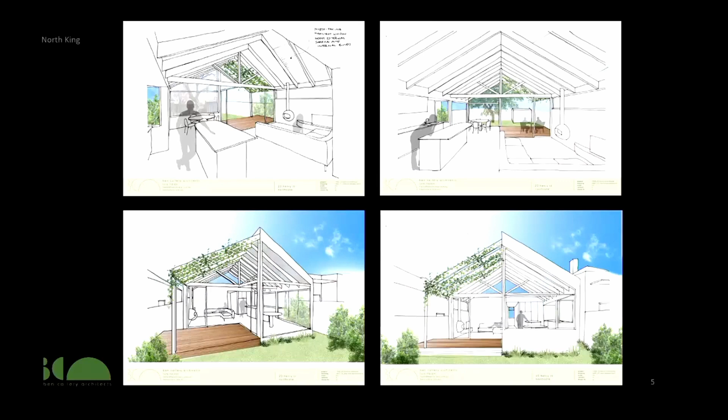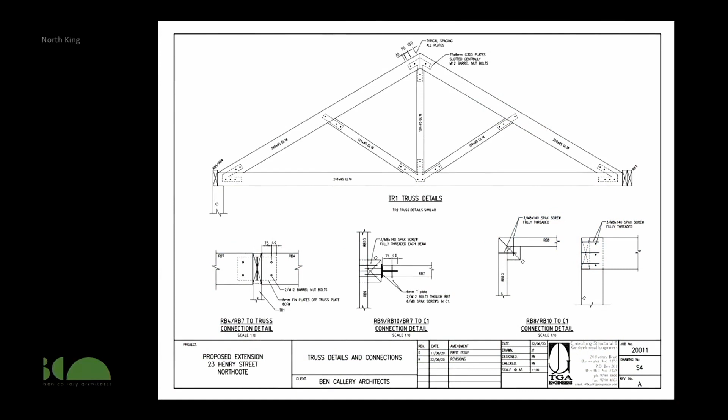So in this project, we're interested in pushing low embodied energy. No steel, virtually no concrete, apart from the stumps. And so we engaged an engineer who specialises in timber structures, because most of our regular engineers would want to use a steel portal frame for a 7.5 metre span.

The truss is an expression of the values of doing more with less, efficiently achieving a large span, an engineered solution using natural materials detailed beautifully. It and the rafters express the structure while providing natural warmth, and the angled struts geometrically echo the branches of the backyard tree.

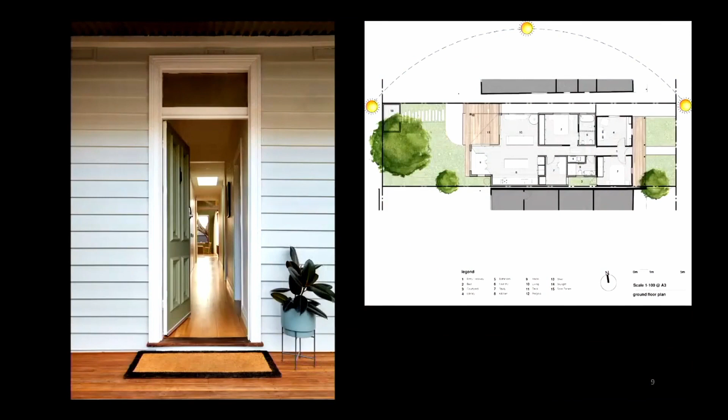So we kept the front of the house as required under the heritage overlay. Basically redid the floors, wall linings, and upgraded insulation throughout. It's a really compact footprint. Our clients initially wanted to go 2-storey, but we convinced them that a well-considered single-storey design would meet their needs and allow them to put more money into the quality rather than quantity of space.

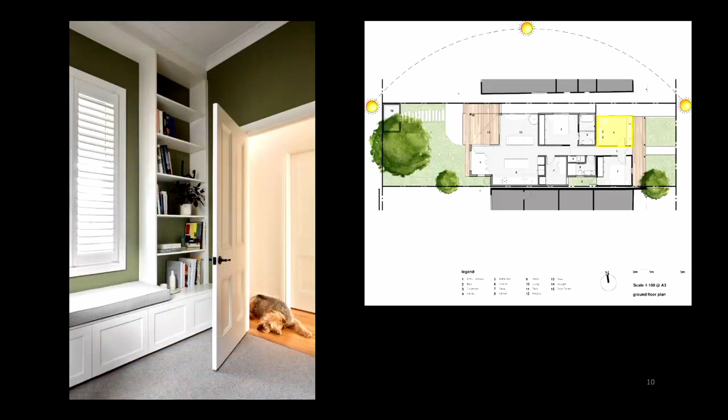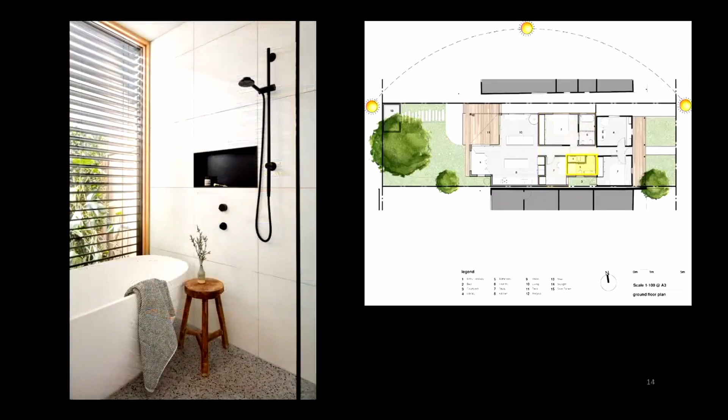The front 2 rooms were retained and appropriated as a library and a bedroom. And then under a new low flat roof between the old and the new, we inserted a new compact study and a bedroom with an ensuite. And a Euro laundry and bathroom. With the compact footprint, obviously the use of light to create a sense of space is really important.

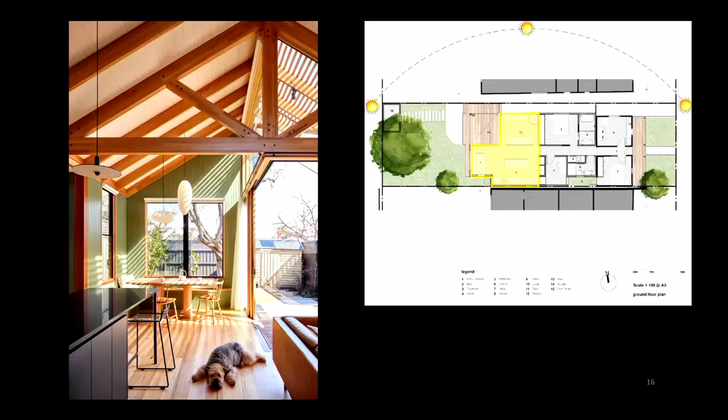Here we are in the new living room. The pitched roof speaks to that of the original heritage part of the house while being designed to more contemporary motives. It is rotated 90 degrees to the original pitched roof and uses a cathedral ceiling to provide a sense of volume and space greater than its modest footprint. Triangular windows to the east and west express this pitch while bringing in morning and afternoon light.

On the south side, an openable skylight above the kitchen provides cross ventilation. The L-shaped room opens onto a northwest facing deck. The truss, spanning 7.5 metres across the width of the house, allows perpendicular sliding doors to open right back, connecting all 4 zones without the hindrance of a structural post, while bringing natural light streaming into the living rooms.

We had a classic on-site builder discussion with the truss. The engineer had these cleats to join all the different elements together, and the builders, awesome builders, did a really great job and made the truss themselves on site, but wanted to express the cleats on the outside. And we don't know whether it was them wanting to just make it as easy as possible, or they actually genuinely thought it would look better. But we thought, nah, sometimes you just got to push back and go, no, we'd really rather conceal them, and they rebated them in, which was really nice.

Highlight windows on the north side bring more warming winter sun over the neighbouring rooftops. And of course, external shading is a really important element to control summer sun. Internal window furnishings are selected to soften the space while controlling glare. And the colour palette of the interiors against the natural materials provides a tranquil, relaxed feel, a retreat from the busy world.

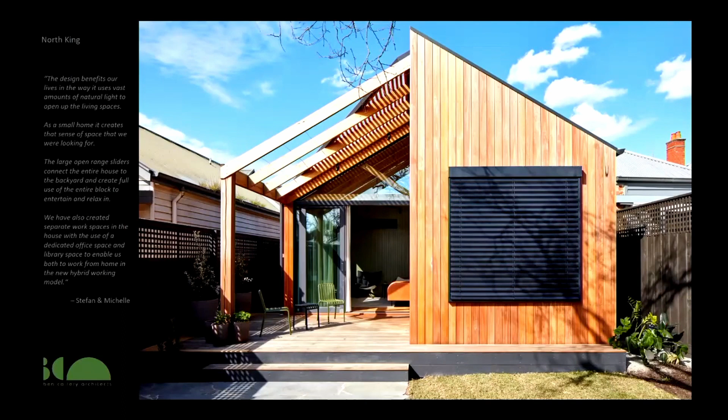And this ethos follows with solar power generated on site. And of course, external shading to control the summer sun and reduce the cooling load. The external cladding is all PEFC certified blackbutt, which will grey gracefully, but hopefully lasts for a very, very long time.